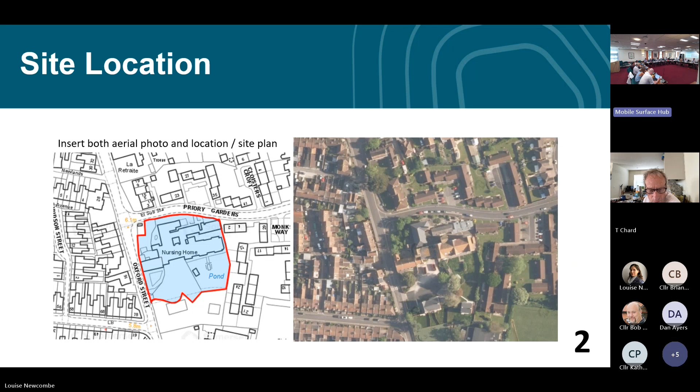The proposed 2- and 3-storey building would be formed of multiple sections, with a 2-storey section along the northern side of the site and 3-storey sections along the south. We'll have a look at the elevations in a moment and it'll become clearer. The buildings would comprise a number of sections joined together to form a varied aesthetic appearance with differing roof heights, materials, and architectural features.

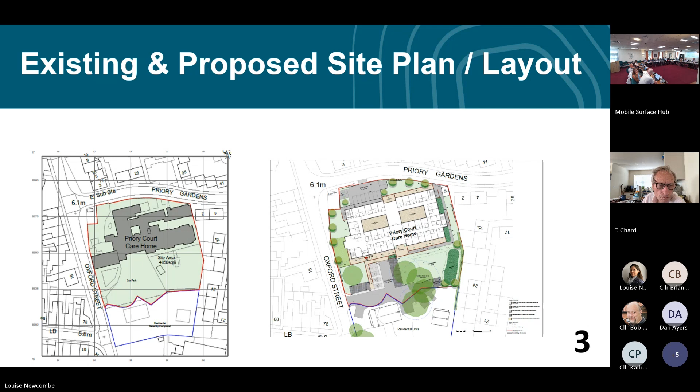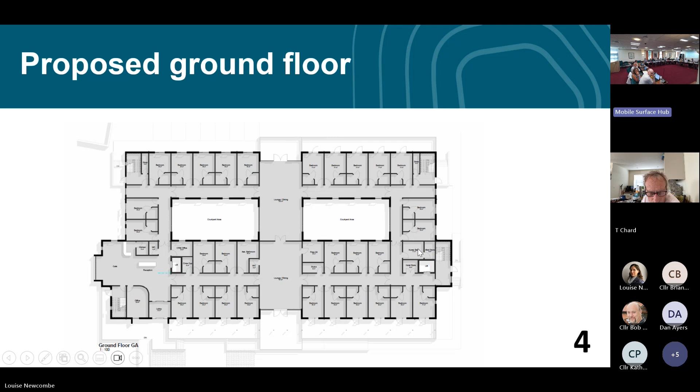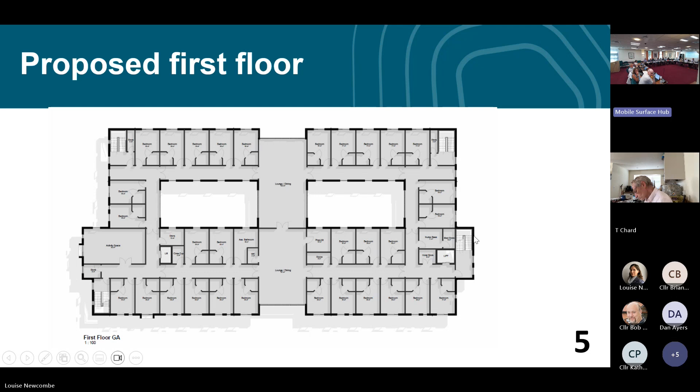The first floor would be similar to some degree. To the left we've got an activity space, and here is the activity space and a store here.

And the second floor - this is the 3-storey element, centered towards the southern side of the building. We've got a lounge dining room up here, bathroom, nurse's space, plant room in the middle, activity space below. We've got a kitchen on this side, laundry and staff room.

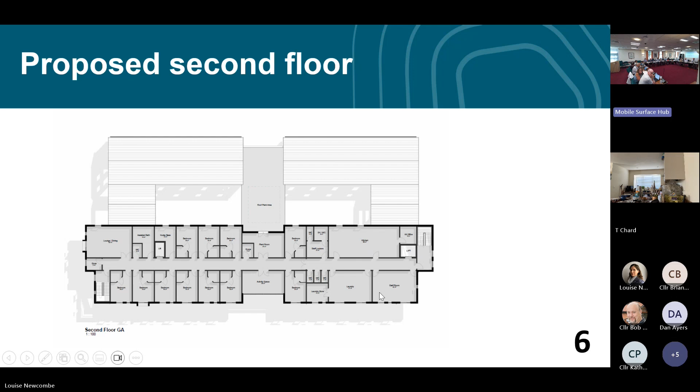These are the proposed elevations, indicating varied roof heights and varied faces, so that it doesn't look like one big block of a building. This elevation faces eastwards, and the bottom elevation faces north, which is Priory Gardens. There you can see the lower 2-storey element fronting Priory Gardens, and the taller 3-storey rear.

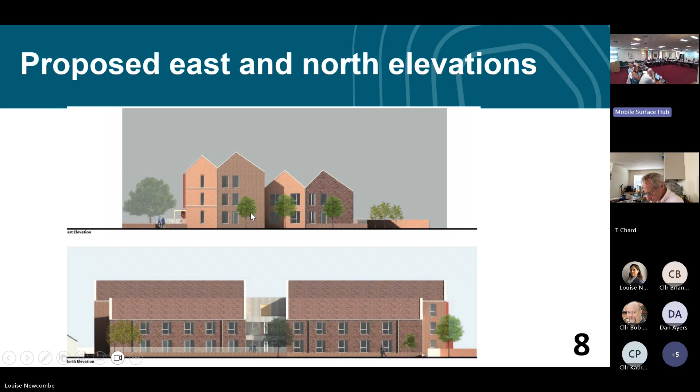These are the other elevations. This elevation faces - sorry, I got that wrong - that elevation does face west, the bottom one faces south. I'll read that from here: this elevation faces Oxford Street, and the bottom elevation faces into the site itself.

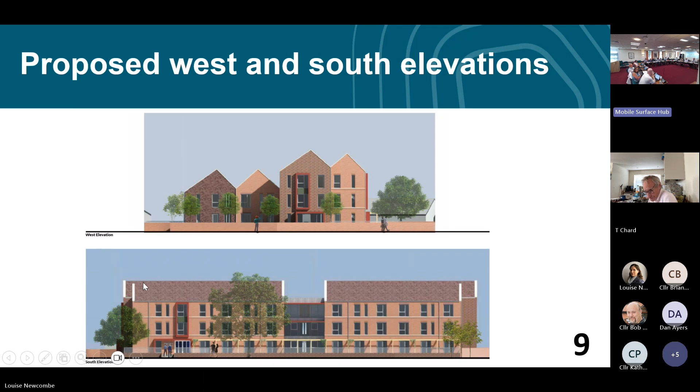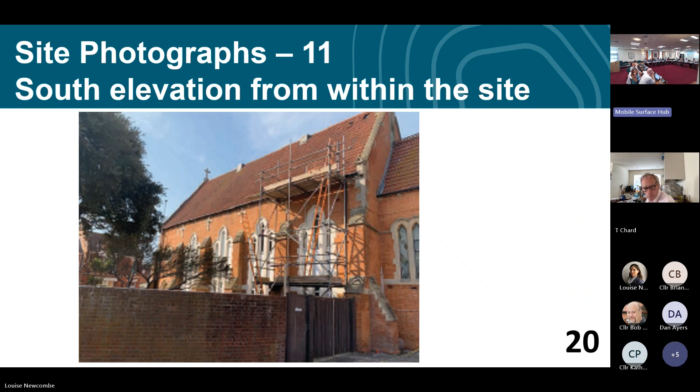That one shows the site in relation to one of the existing bungalows to the east of the site. This is from within the site, showing the link between the chapel, which is to the side here, and the Victorian building. This is the chapel itself, and to the side is the Victorian building.

So in terms of the main issues of the application, the main issues relate to the principle of the proposal, taking into consideration the fallback position of the deemed demolition consent. The main issues also include consideration of the character and appearance of the area, residential amenity, and highway safety.

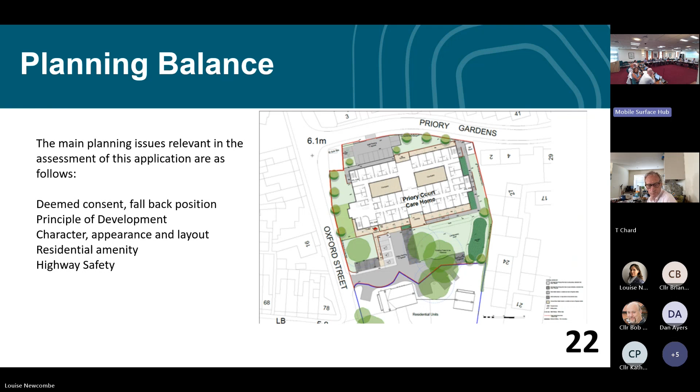Now, in terms of the principle of the application, the site lies within the Burnham-on-Sea settlement boundary. The building is not listed, it's not in a conservation area, and furthermore, deemed demolition consent has already been granted. So in terms of a fallback position, the buildings could be demolished with no further consents.

The policies within the local plan support development opportunities within identified settlement boundaries, and include the reuse of previously developed land and buildings and employment proposals. Particularly policy D7 supports proposals for specialist accommodation and seeks to resist the loss of existing care homes and specialist accommodation. The existing use of the site as a care home has been closed for some time.

I think it was closed in November 2022. This proposal seeks to provide a replacement purpose-built care home which would function more effectively and efficiently. The applicant has undertaken feasibility studies for the conversion of the existing premises, but have established a number of issues, which are listed on paragraph 11.6 of the report.

Those issues include inadequate corridor widths, changes in level across floors, disproportionately high ceilings in certain areas, disproportionately low ceilings in other areas, poor natural light, poor communal spaces, disjointed circulation, configuration of rooms making appropriate staffing difficult, and an appropriate fire strategy being difficult to maintain.

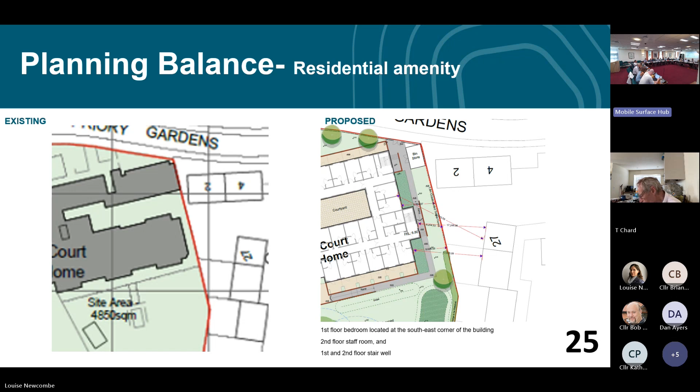In terms of highway safety, the proposal seeks to utilise the existing access into the site, which has already been improved with the consent of the two houses to the south. The proposal also includes a new access to the north off Priory Gardens, leading to staff car parking.

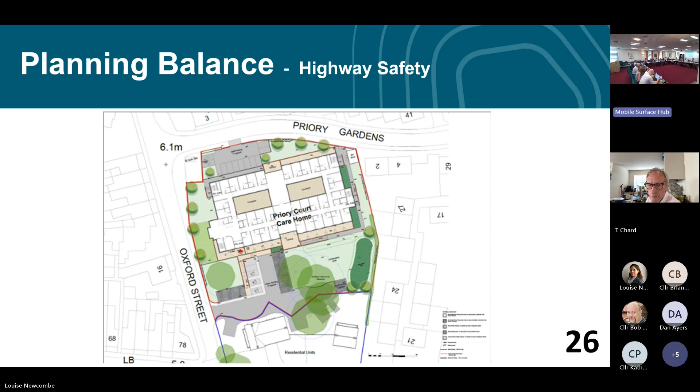The Highways Authority have raised no objection to the application, and given that the proposal is on a like-for-like basis, with the overall numbers of bedrooms being provided similar, the use of the access would not cause any material additional traffic movements. Given the benefit of a new separate staff parking area, the proposal is not considered to be detrimental to highway safety.

To summarise, the principle of a care home on the site of the existing care home within the settlement boundary is acceptable. The development would have no adverse impact on the character of the area, residential amenity, highway safety, ecology, flood risk, or heritage assets. Therefore, the recommendation is to grant consent.

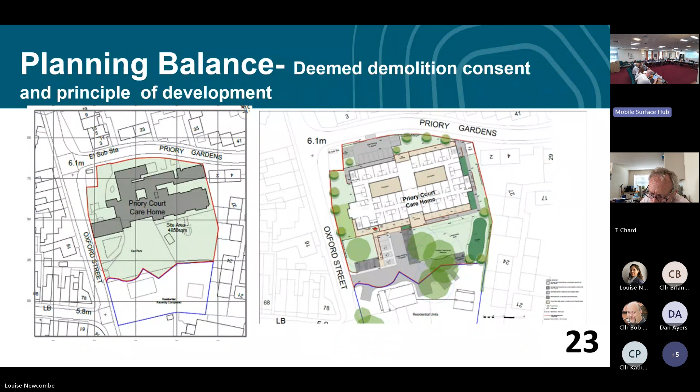I have the slide up that showed a couple of things - one was the building that's currently there, and the other is those design elevations. I must admit, the principle of this, no problem whatsoever, can't see any issues with it at all. Highways, I think we might have some concerns about numbers, but to be honest it's no more than what was there before, so I think we're on a very sticky wicket on that.

The thing that I find a little bit difficult to get my head around is the design - the layout, the bulk and massing of the building, no problem whatsoever. But when you see the building that is there currently, and I know we've got permission to have it knocked down, for us to state that we're not going to change or deteriorate the character of that area, I'm struggling with slightly. When you see the original building, there is huge amounts of character in that - the Priory, the Victorian building, you've got fenestration which is very attractive and adds to that area of the town. It's not a hidden away building - as you go along Oxford Street it is in your face and you are well aware of that construction.

So where I'm struggling slightly, when we talk about this being - I think the phrase used by the applicant was 'best in class' - I think it probably is in terms of what's inside the building, I have absolutely no problem with that, and I think that is an improvement of what's there. I'm just really disappointed that we haven't got something more in the design. I don't want a pastiche of what was there by any means, but there is such character and it's such a prominent site within Oxford Street. I'm driving past that for the next 20 years, looking and thinking, is that really what I voted for? So I'm looking for a little bit of understanding from the officers as to how we've ended up with that design, because it just comes across as something of nothing. Now maybe there's more in there in terms of materials and fenestration around the windows that I'm not picking up from that level of design, but it just feels to me completely two-dimensional, flat. Such a prominent and major building that's going to be there for a very long time and affect the street scene of Burnham for the next 100 years.

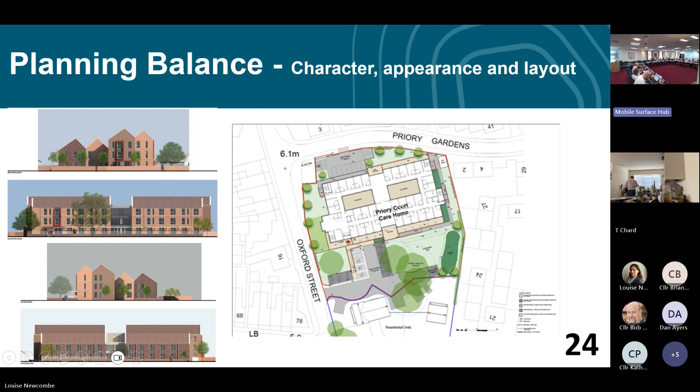Okay, thank you, members. We'll now go on to our second application of the afternoon, agenda item 6, the application for land to the north of Hellier's Lane in Cheddar, erection of 28 dwellings, on pages 45 to 82. Lily, would you like to take us through the presentation, please?

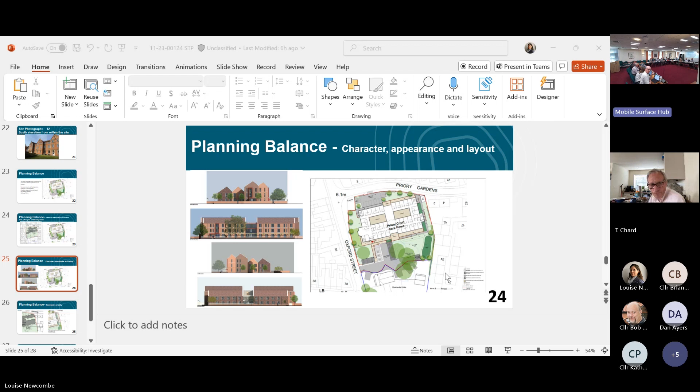Thank you, Chair, good afternoon everyone. So this is the application on land to the north of Hellier's Lane in Cheddar for the erection of 28 dwellings and associated works. The application is before committee because the parish council... sorry, but the presentation hasn't changed, I'm not on my screen. I don't know about others. Thank you. Sorry about that, it was all fine here, let me get rid of that.

Okay, so the application is before members because it's a major application, so it didn't get referred. Cheddar Parish Council are objecting due to concerns about highways impacts, affordable housing provision and surface water drainage. Axbridge Town Council, the adjoining parish, are also objecting because of concerns about highways impacts. Since the publication of the report, there have been a few tweaks to the conditions, mostly relating to trigger points. So there's clarification that EV charging points and cycle storage relate to each dwelling, not prior to occupation of any of the plots, so that each plot has that available when it comes to occupying those properties. That is mostly clarification about the triggers relating to specific plots.

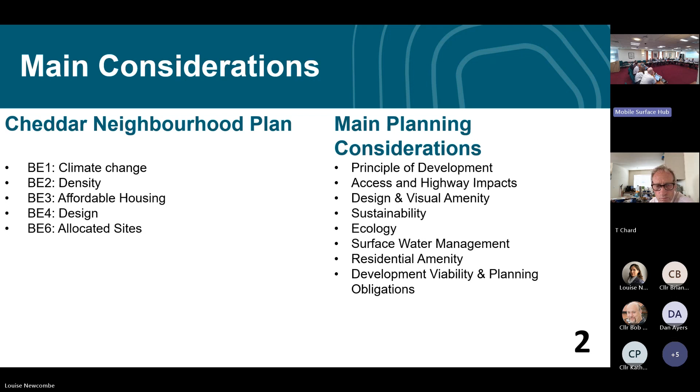Quite a lot of the policies in the local plan are relevant for this one. Cheddar also has a neighbourhood plan, and this is the list of the key main planning considerations as well.

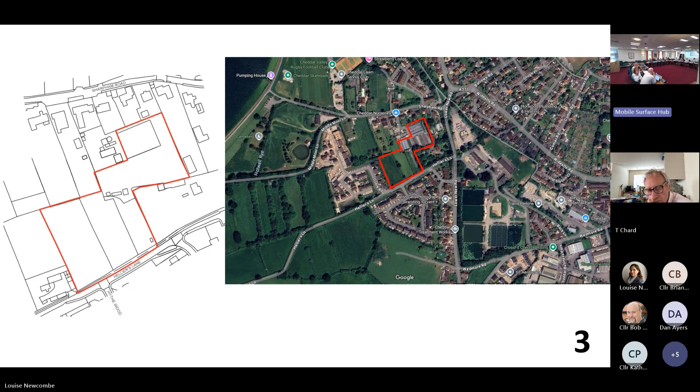The application site is located to the north of Hellier's Lane with residential development surrounding it. The site currently comprises a nursery/retail business, accessed via Sharpham Road to the north, approximately where the blue pin is on the aerial. The application seeks full planning permission for the erection of 28 dwellings, including creation of access onto Hellier's Lane and associated landscaping, with an attenuation pond located within the southwest corner of the site. The development would be partly sited on existing greenhouses and polytunnels associated with the existing nursery business.

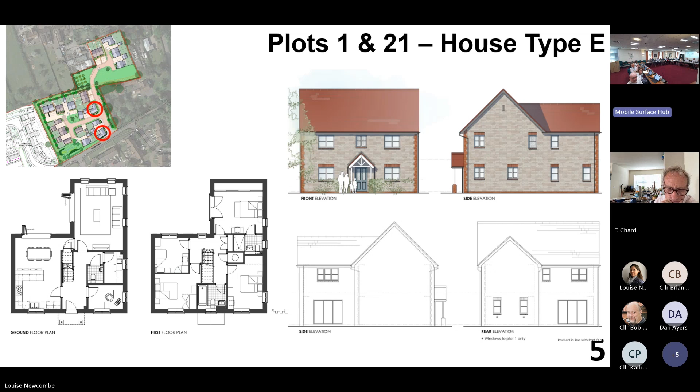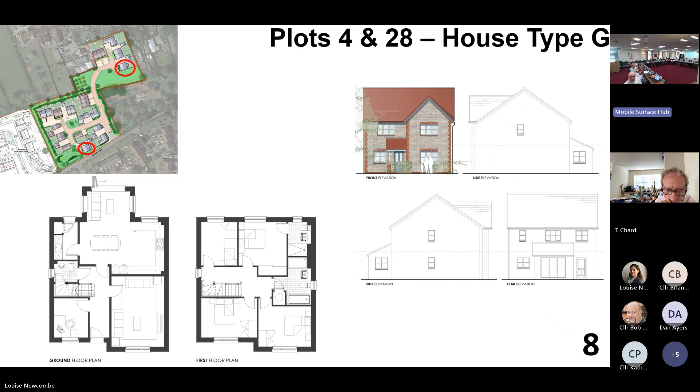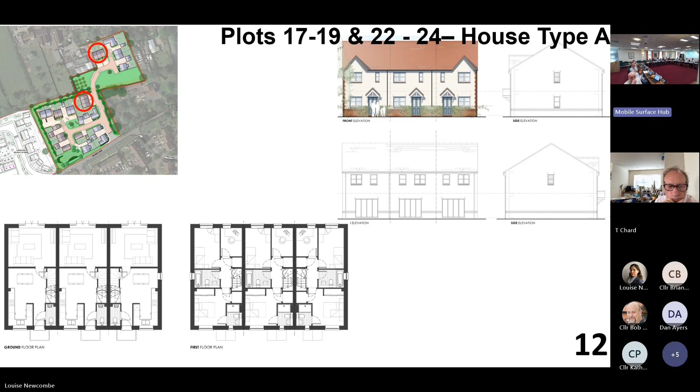And then we move on to photos of the site. With these, I've done a site plan on each photo with a yellow dot to indicate the approximate location where I was stood when I took the photo. So the field currently has a field access from Hellier's Lane, and that is where the proposed access is going to be. This is looking towards the west along Hellier's Lane.

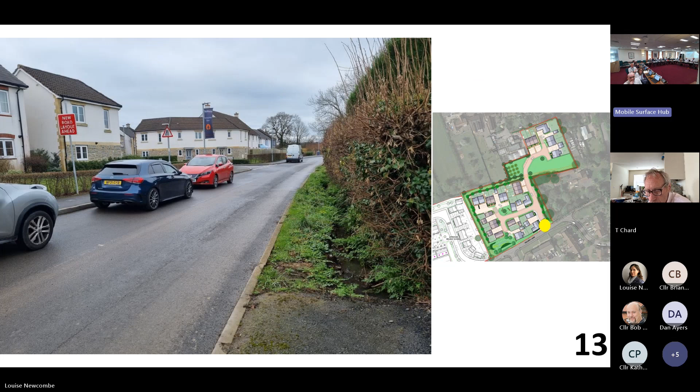As you can see, opposite the application site, there's relatively modern housing development. And on the same side of the road as I am, there is a housing development under construction, essentially behind where that hedge is in the photo. This is stood in the same location, just looking the other way along the road.

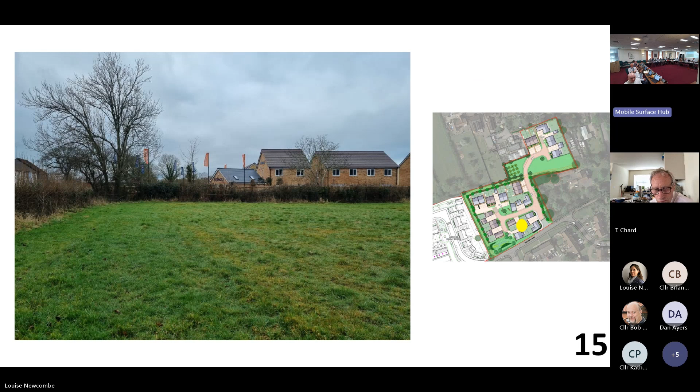So then this is moving towards the southern part of the site, looking towards the southwest, and those yellowish houses are the residential scheme that's currently under construction. And then looking towards the northwest, or panning round.

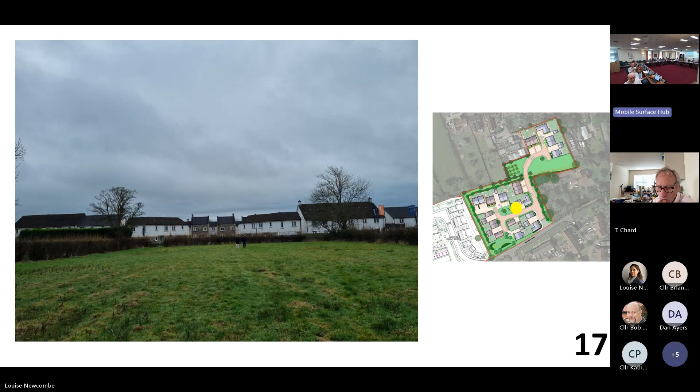And then this is stood further within that part of the site, looking towards the south, so you can see a bit clearer the types of property that are along Hellier's Lane in this part. And then this is looking towards the northeast.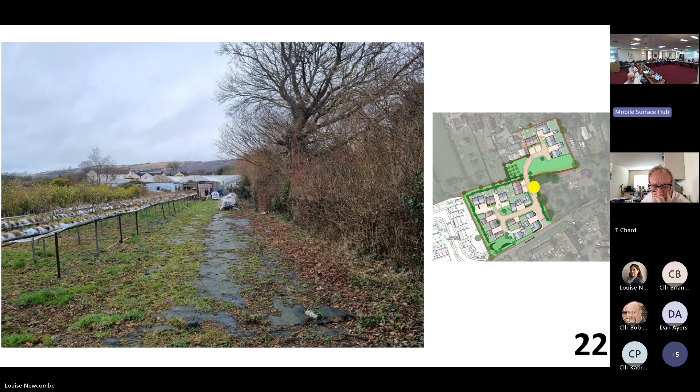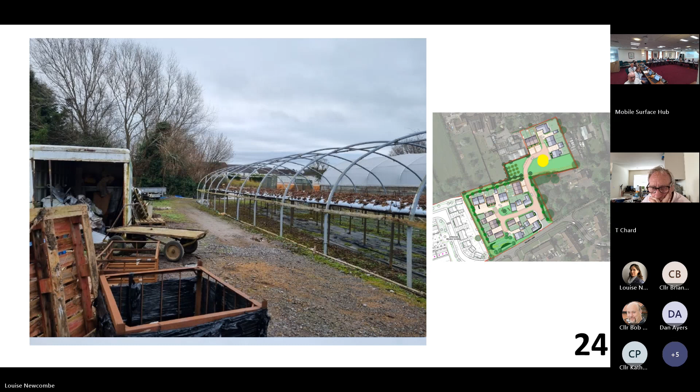And again, views from within the site, looking north. So yeah, as you can see, the polytunnels and the greenhouse. This is looking towards the south. And then that's looking back within the site, so to the west.

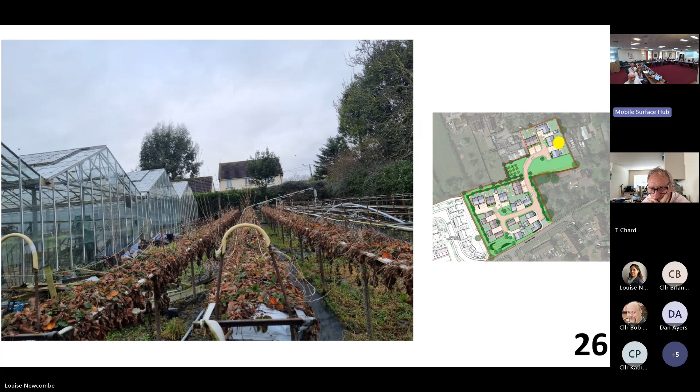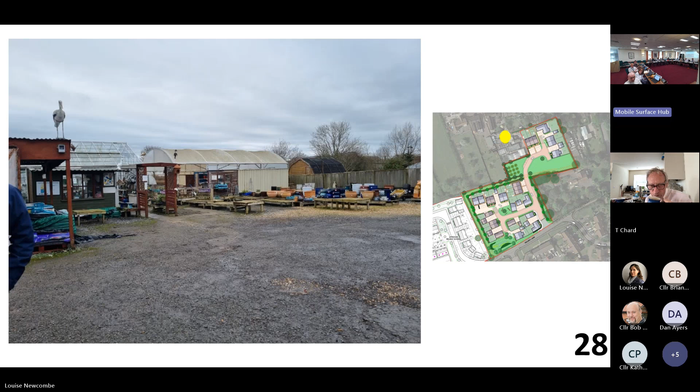Then in a similar location, looking north. And then looking north again, so you can see the adjacent properties that are along Sharpham Road. And then this is a picture of some of the garden centre buildings which are to remain as the business is to continue, I'll come on to that shortly.

So in terms of the principle of development, the application site falls partly within the development boundary, which I don't know if it's that clear on the image, but where the green line is the development boundary for Cheddar, with the remaining area within the housing allocation made by policy BE6 for the Cheddar neighbourhood plan.

So that neighbourhood plan allocation isn't shown on this map because the pink bit is a local plan allocation for housing. But it's effectively the gap between the pink area and the development boundary. So that's the part that's allocated by the neighbourhood plan for housing.

The policy in the neighbourhood plan allowed for 177 homes total across the Helliers Lane area and Round Oak Farm sites. At Round Oak Farm, 96 dwellings have been consented, and at Helliers Lane, so far 60 have. So this brings the total to 156 consented dwellings, with a remainder of 21 of the allocation.

So whilst the proposal is for 28, the surplus of 7 dwellings is not considered to be significantly detrimental, especially given the 5-year housing land supply position of the former Sedgemoor area.

The site currently accommodates a nursery business with a retail element that has become the main part of the business in more recent years. The proposal seeks to develop land that has previously been used for growing plants to serve the business, and the retail part of the business is to remain.

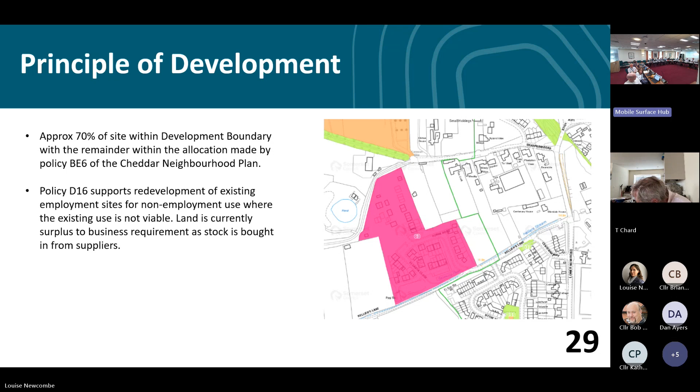The submitted planning statement sets out that as stock is bought in from suppliers rather than being grown on the site, this land is no longer considered to be required for the business to continue operation, and it's also not proposed to lose any employment from this business either.

Considering affordable housing, the proposal seeks to provide 22.5%. The reason for this bizarre percentage is that a blended approach has been used, as the site is made up of both greenfield and brownfield. This is to be delivered through 6 dwellings on site and a financial commuted sum secured by Section 106 to make up the remainder, 0.3 units.

The Affordable Housing Officer has commented on the scheme and is happy with the blended approach. They did comment that the dispersal of the affordable housing units could perhaps be improved. However, given that they are sited close to open market dwellings, and considering the scale of the proposal, it's not considered unacceptable that they are located there.

I have marked them with a yellow star on that plan. I don't know if you can see. So, considering the open market dwellings and the housing mix, this is broadly in line with the criteria in policy D5.

In respect of other commuted sums proposed to be sought, the NHS have recommended a financial contribution, and this would be secured by Section 106. The proposal is therefore considered compliant with policy D28 of the local plan.

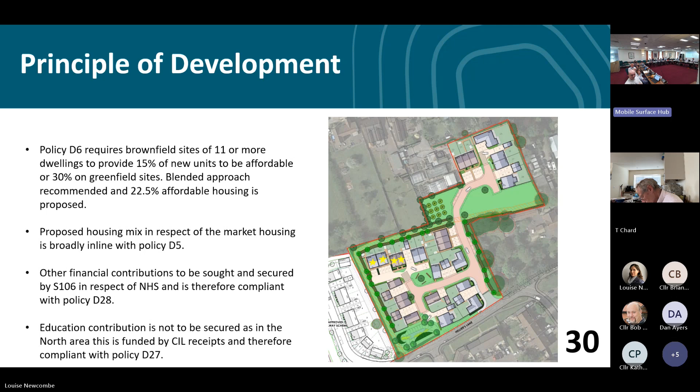Originally an education contribution was requested. However, considering the site is in the former north area where there is CIL in operation, this would be funded through CIL rather than a Section 106. This is therefore considered compliant with policy D27 of the local plan.

In terms of policy D34, this sets out the expectations of new residential developments regarding delivery of on-site play space and the maximum distances from facilities. The proposal seeks to include a focal green space play area within the centre of the development, centred around an oak tree. This has been reviewed by the Parks and Open Spaces Officer and considered acceptable, with the recommendation that the exact specification and delivery of the LAP be secured by Section 106 obligation.

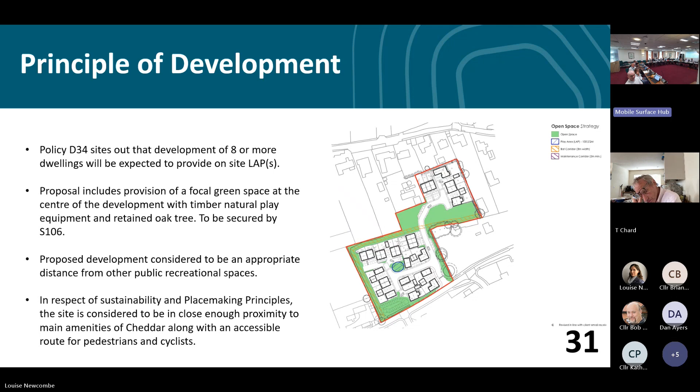Considering the council's placemaking principles and sustainability considerations, the proposal is considered to be in close enough proximity to the main amenities of Cheddar, along with an accessible route for pedestrians and cyclists. Additionally, the submitted energy and sustainability statement sets out that the dwellings proposed are to be served by air source heat pumps and solar PV systems. If consent were granted, conditions would be applied to secure details regarding EV parking and cycle storage, along with the standard water efficiency condition for new dwellings.

So we now move on to the details of the scheme. The application site, whilst at the edge of Cheddar, is in close proximity to existing residential development.

In respect of the Mendip Hills National Landscape designation, formerly known as the AONB, this is approximately 900 metres from the edge of the site. Considering the distance and the intervening development between the two, it's not considered that this proposal would have a detrimental impact on the AONB.

An LVIA, Landscape Visual Impact Assessment, has been submitted and sets out mitigation measures to be incorporated into the landscaping plan, proposed to be secured by condition. The LVIA also concluded that by year 10, the impact of the proposal would have a slight adverse impact on the surrounding landscape, but this is considered acceptable because of the mitigation measures that can be secured.

Considering the site layout, this is comparable to the surrounding residential developments, and it's not considered to result in a cramped or contrived pattern of development.

Considering the details of the houses themselves, the house types proposed are of a size, scale, design and finish considered to be in keeping with the character of the surrounding area. Therefore, in this respect, the proposal is considered compliant with policies D2 and D19 of the local plan and BE4 of the neighbourhood plan.

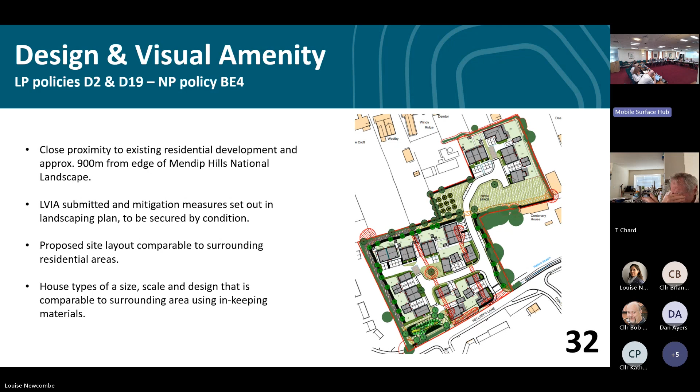We then move on to ecology. A shadow HRA was submitted setting out the potential impacts on the SAC, which stands for Special Area of Conservation. The shadow HRA sets out that the proposal would result in a permanent loss of approximately 0.48 hectares of potential foraging habitat. This was accompanied by a HEP calculation concluding that 0.16 hectare and 0.13 hectares of replacement habitat would be required for greater and lesser horseshoe bats respectively. The proposed development seeks to provide more than what was set out as needed by the HEP, proposing 0.19 hectare for greater horseshoe bats and 0.13 hectare for the lesser horseshoe bats. Therefore, the scheme is considered to be able to provide the required mitigation.

The shadow HRA therefore concludes that it's highly unlikely that the proposal would result in a significant impact on protected species and their habitats, providing that the mitigation set out in the document can be secured by conditions. Natural England reviewed the shadow HRA and set out that, providing the LPA are satisfied that a sensitive lighting strategy can be provided, the shadow HRA can be endorsed. Following on from this, the county ecologist confirmed that the shadow HRA can be adopted, and therefore the responsibility under Regulation 63 of the Conservation of Habitats and Species Regulations is considered to be fulfilled.

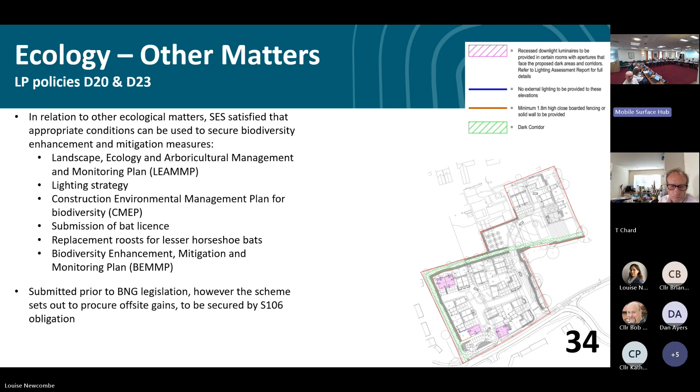Now we move on to surface water management. The parish council and third parties raised concerns that the proposed scheme would not be served by a suitable surface water management scheme, and that existing surface water management issues in the vicinity would be exacerbated by the proposal. The LLFA have reviewed the submitted details and have raised no objection to the principle of the scheme, and have recommended conditions to secure further details in respect of a sustainable surface water drainage scheme. The IDB also have no objection to the scheme, and are accepting of the discharge rate for the site. They have also recommended securing a surface water overland flow exceedance plan by condition. It's therefore considered that in this respect, the scheme is compliant with policy D1 of the local plan.

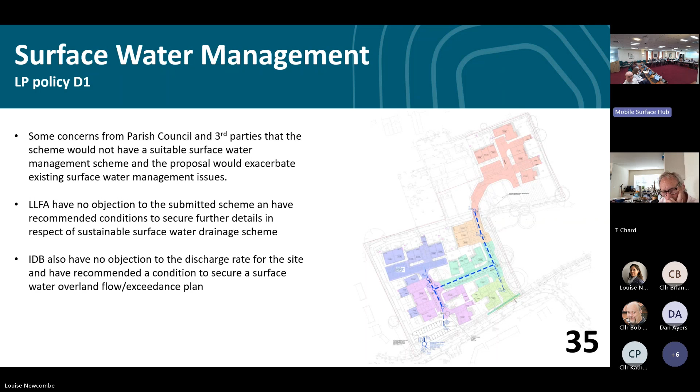Considering residential amenities, in terms of the amenities of neighbouring residents, the proposed dwellings are considered to be an adequate distance from existing and under-construction dwellings, such that there would not be a detrimental impact in terms of overlooking, overshadowing or over-dominance. In respect of the amenities of future occupiers of the proposed dwellings, each of the dwellings is considered to be served by adequate external amenity space, with internal accommodation meeting national space standards and adequate levels of natural light to all habitable rooms.

The proposed dwellings are considered to be well distanced from each other, and if consent were to be granted, conditions would be used to prevent first floor windows on certain elevations of plots 13 and plot 16, to prevent unacceptable overlooking. That's because of the juxtaposition of the houses to each other. It's considered that if a window was to be inserted, that would be a problem, but we can condition it so that doesn't happen without our prior approval.

Environmental Health have also reviewed the scheme and have recommended a condition to secure a CEMP to protect amenities of neighbouring residents, and also contaminated land reporting to protect the amenities of future occupiers. A third party raised concern that the proposals would generate antisocial behaviour, but the designing out crime officer from the police force has raised no objection to the proposal.

And ultimately, if criminal activity were to occur, this would be a police matter, but there's no fundamental concern with the design that would result in hotspots, essentially likely hotspots of criminal activity.

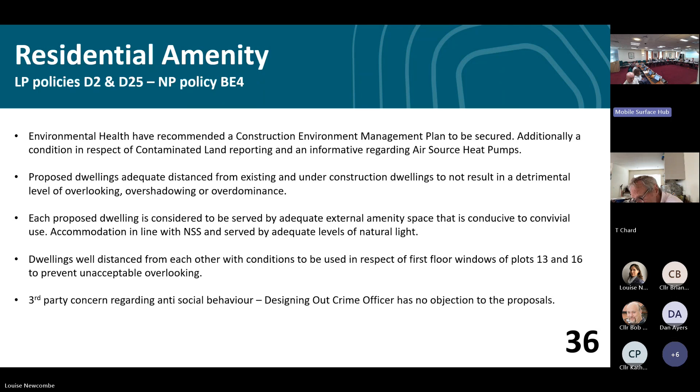So to summarise, if consent were to be granted, a Section 106 agreement would be used to secure obligations in respect of affordable housing, so that's delivery on site as well as the commuted financial sum, NHS financial contributions, details and securing the LAP, highway works to the junction, and also securing BNG off-site credits. The proposed obligations are considered to meet the statutory tests set out in legislation and the NPPF, and the applicant is agreeable to these proposed obligations.

So considering the planning balance, the north area does not have a 5-year housing land supply, and therefore the tilted balance is engaged. This means the consideration of this planning balance is tilted in favour of granting planning permission, unless there are adverse impacts that significantly and demonstrably outweigh the benefits.

The officer's assessment has identified that there would be considerable benefits from granting permission, including the sustainable location of the development, the effective use of land, and the provision of affordable housing. In addition, the site falls partly within the development boundary, with the remainder within the housing allocation set by the neighbourhood plan. The proposal also seeks to provide policy compliant affordable housing provision and an appropriate open market housing mix. In respect of the constraints of the site, a shadow HRA has been submitted and endorsed, and considered to be an acceptable assessment by Natural England and the county ecologist.

So as well as conditions to secure ecology mitigation enhancements, other conditions can be used to secure measures in respect of highway safety, surface water management, and other mitigation measures to ensure no detrimental impact on visual or residential amenities. Also, a Section 106 is to be used to secure the relevant financial and delivery obligations. It is therefore considered that the proposed development is compliant with relevant policies of the local plan and neighbourhood plan, and the officer's recommendation is to grant planning permission subject to appropriate conditions and Section 106 obligations. Thank you.

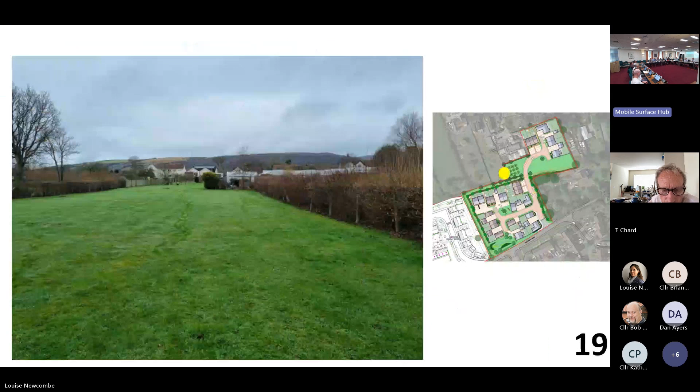Councillor Filmer: Can we possibly have the site plan up? Out of curiosity, there's a run of green through the middle of the site, open space. Was just wondering if there was any particular reason as to why that was there. Is there an easement or something that stops development there? It's interesting to see a complete run of non-development in the middle of the site, which is unusual.

Just wanted clarification following our last meeting, where we had a long discussion about dimensions of garages. Just wanted reassurance that the garages are the dimensions we require for a real garage, not a non-functional garage, as we were told last time.

And the final question was to do with access. You mentioned this highway access to the south areas. Is there any access to the north, pedestrian, or is all access just through the Helliers side? There's nothing going out to Sharp Road itself. So it's all down through Helliers Lane.

The garages, yes, they are functional size garages. And in terms of the green space, from memory, I think there's a sewer, but I can't remember exactly. It worked well because it helped retain a dark space for bats. I can't remember the exact reason why it's there, but I think that might be it.

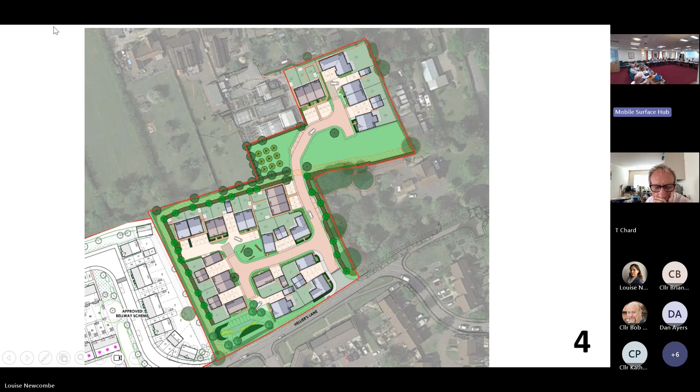Okay, so all those in favour please show. That's 11 for, any against? 2 against, and that means there are no abstentions. So that has passed. Thank you, members.

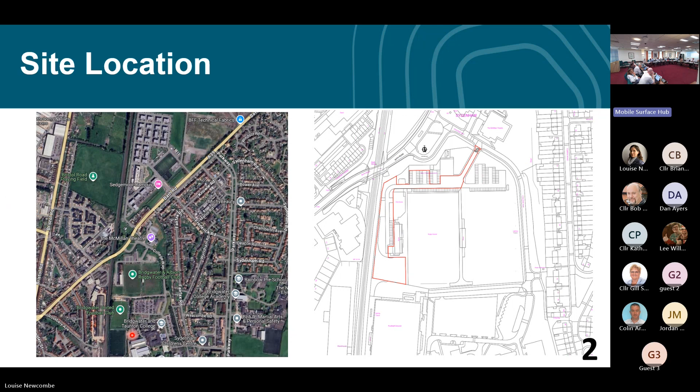It's intended that this would link in terms of the pathways, which would allow people to safely access their car and manoeuvre to the bus stop.

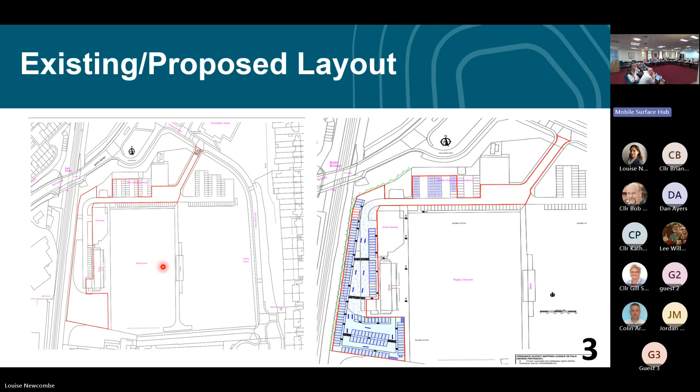As originally noted, the idea is that people would travel here, park at the site, and then walk along to the Sedgemoor campus to catch the bus.

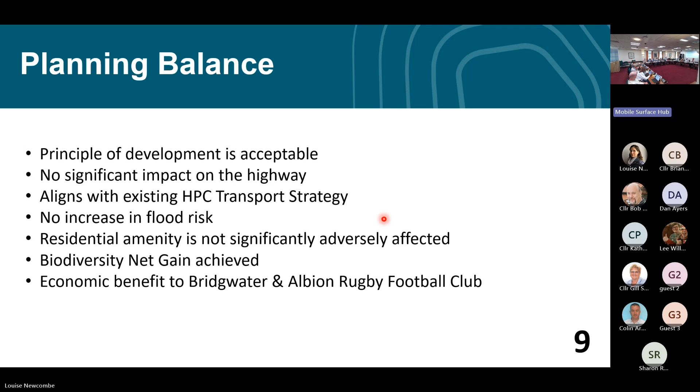It's also worth noting there is an economic benefit to Bridgwater and Albion Rugby Football Club, providing them with an enhanced, improved facility. As we're all fully aware, the rugby club is a long-standing community sport facility within the town, taking children into training and beyond, and hosting adult matches - it's a very well used facility. Having something that provides a long lasting benefit is worthy of note in considering the application.

To summarise, the recommendation is to grant planning permission subject to the conditions set out in the officer report. Thank you, Chair.